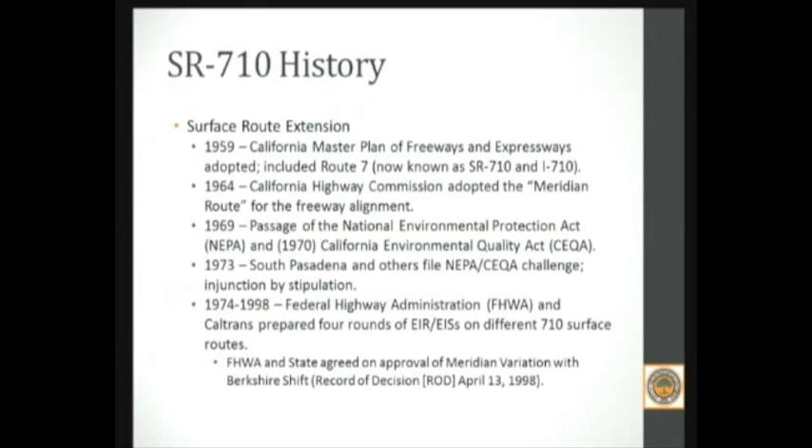We have some administrators at Boalt Hall who say you should use more PowerPoint, and my answer is that of the Marine General who criticized the PowerPoint Rangers in the Pentagon, that you don't argue to the Supreme Court in PowerPoint. So far we've managed to make it that way.

Anyway, Judge Pregerson issued this injunction in 1999, which was merely a preliminary injunction that said you can't build the freeway while we try this claim on the merits, but it was a rather thorough opinion.

In fact, the opinion was so convincing that in December 2003, the Federal Highway Administration decided that if this project was going to go forward again, all of the deficiencies cited by Judge Pregerson had to be cured, and in addition Caltrans would have to show that the project had financial feasibility.

And the state, a few months later, also withdrew its approval. So at present, there is no record of decision, there is no state approval. We're on a blank slate insofar as approvals on any highway construction in this corridor.

Then two more significant landmarks recently. As part of the campaign to build the freeway going back into the late 1970s and early 1980s, a former legislator and congressman from the Alhambra area succeeded in passing a state law that took away South Pasadena's right to insist on a freeway agreement as a condition of freeway construction.

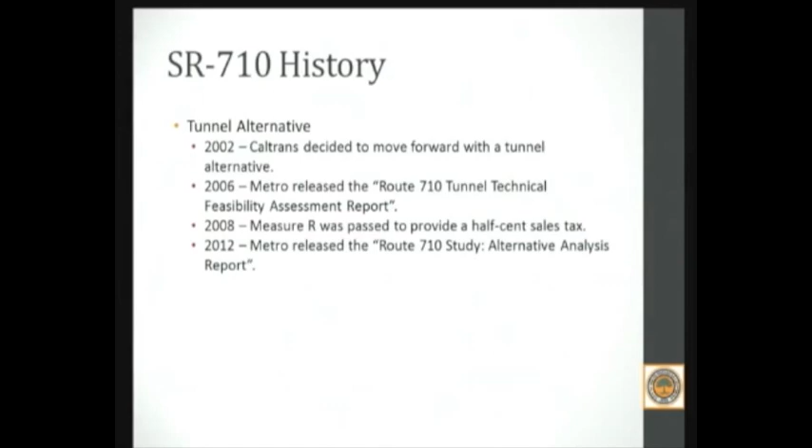Thank you, Tony. You are truly a legend.

Mr. Gold. Let's see. Hello, everyone, City Council, Mr. Mayor. My name is Avram Gold, and I'm here to talk about that.

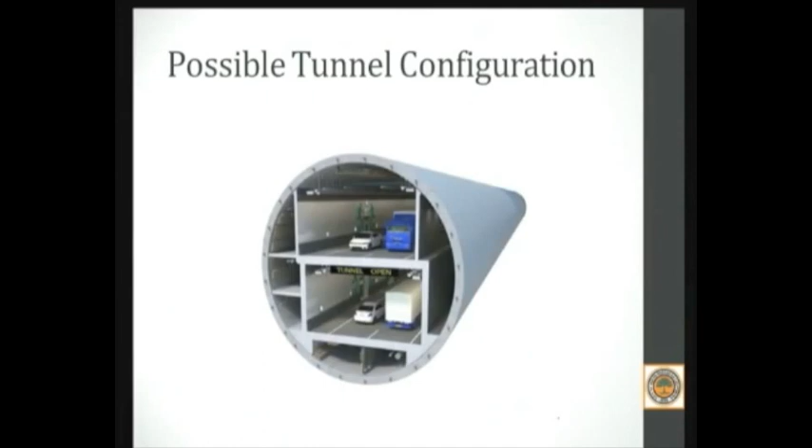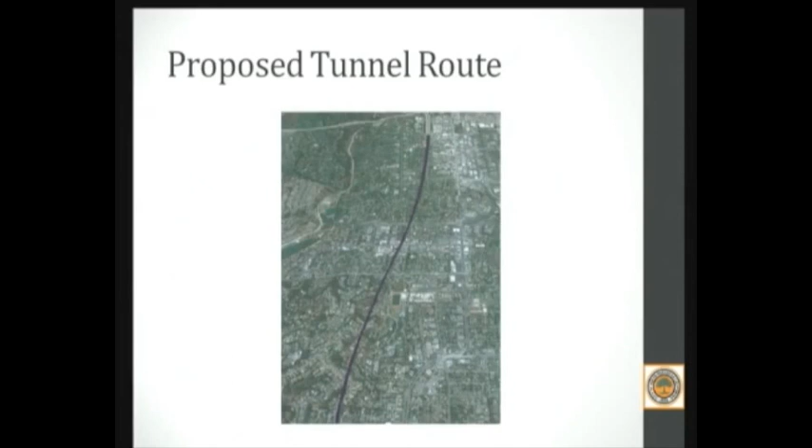One or two 60-foot diameter tunnels that will run under our homes, businesses, churches, schools, and stores in Pasadena, South Pass, and El Sereno. And under all of that, we have this.

Seven different rock and soil densities, along with five active faults. This is where the tunnels are supposed to go through multiple geological challenges. And when you have multiple geological challenges, you need multiple solutions for this.

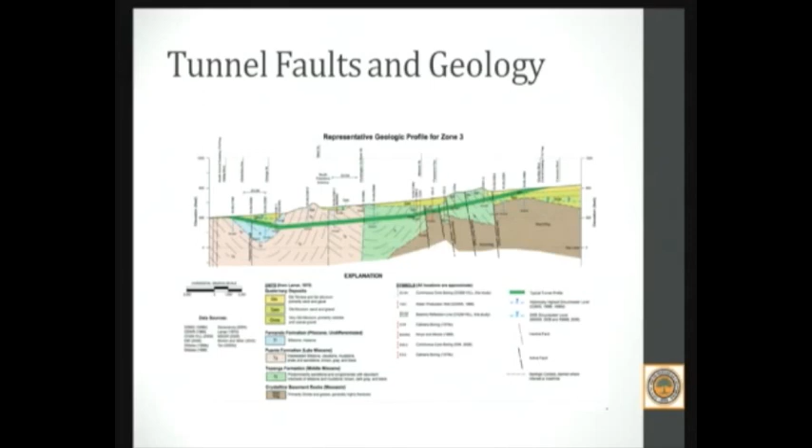A tunnel boring machine, or a TBM for short. A TBM breaks up rocks and soil and carries it away, and while it's doing that, it's building a concrete shield behind it and forms the tunnel.

For many years, 30-foot diameter TBMs have been constructing rail tunnels. But since 2003, when Paris built the A86 road tunnel, TBMs kept increasing in size past 38 feet, all the way to 50 feet, which became the largest diameter TBM to finish a tunnel without a serious breakdown.

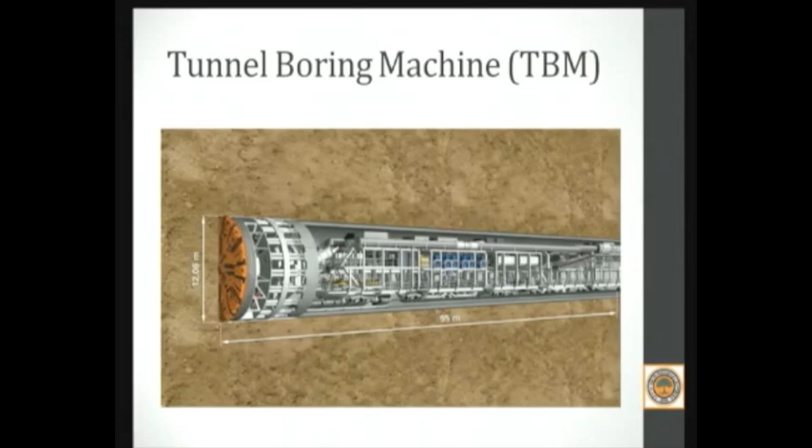Because in 2011, the Sparvo tunnel in Italy had a 51-foot diameter, and that dirt digger stalled for 2 months. Then in December of 2013, Bertha, the largest TBM in the world with a 57.5-foot diameter, overheated and stopped just 342 yards from the launch pit in Seattle, Washington.

And here we have Bertha at the launch pit with its giant cutting head yet to be attached. That's 5 stories high.

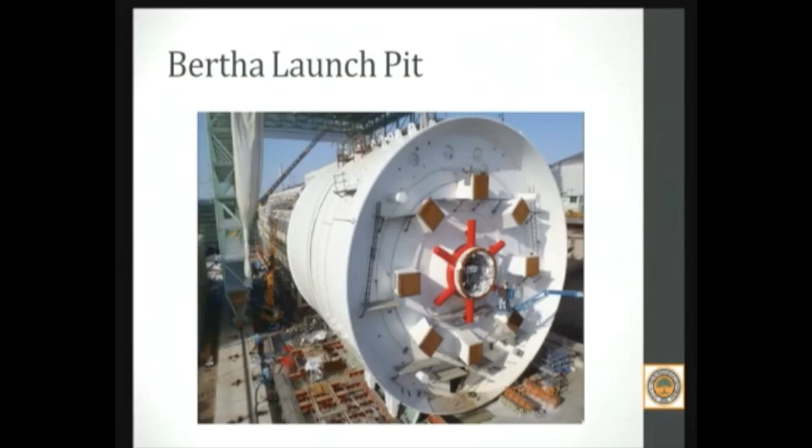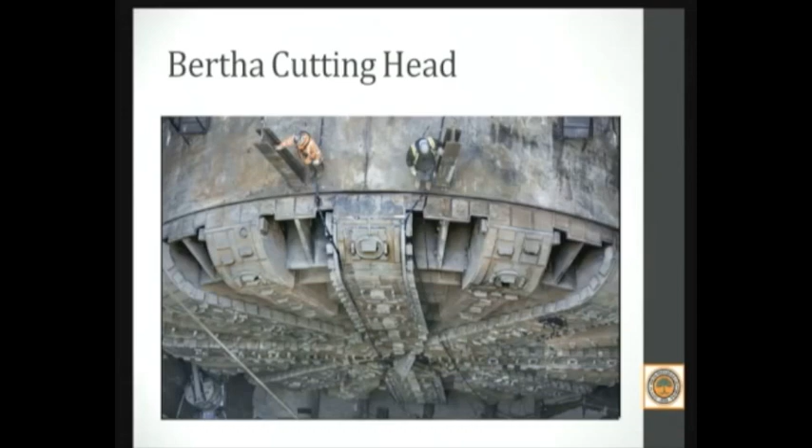Well, as I said, it stopped. And it stopped because muddy, gritty crud that was supposed to stay outside the TBM seeped inside the TBM and sludged around this. That's Bertha's big, giant main bearing.

Okay, let's see, where am I? All right, now the tunnel boring machines break down. They break down a lot.

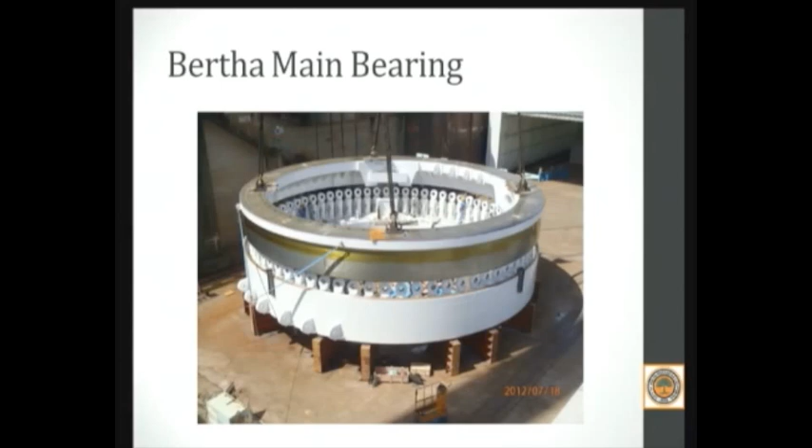And here's a table I put together, which is absolutely impossible to read, and I don't expect you to try it. I brought a number of copies that you can look at and take home. That'll be at the table after my talk and after this meeting. Anyway, this listing describes many things that have gone right but also wrong in the tunnel fabrication business.

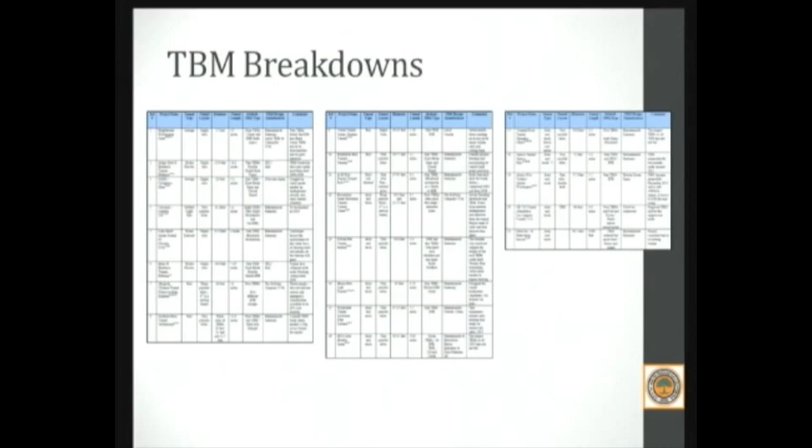Over half of the tunnel projects in the world have faced unexpected calamities, which of course cost a lot of extra money and time. When you're chewing away underground, you really don't know everything that's down there, waiting to gum up your machine or break your cutting discs made of super hard steel. Those black, round, double-edged things, those are the cutting discs, and they have to be changed when they wear out.

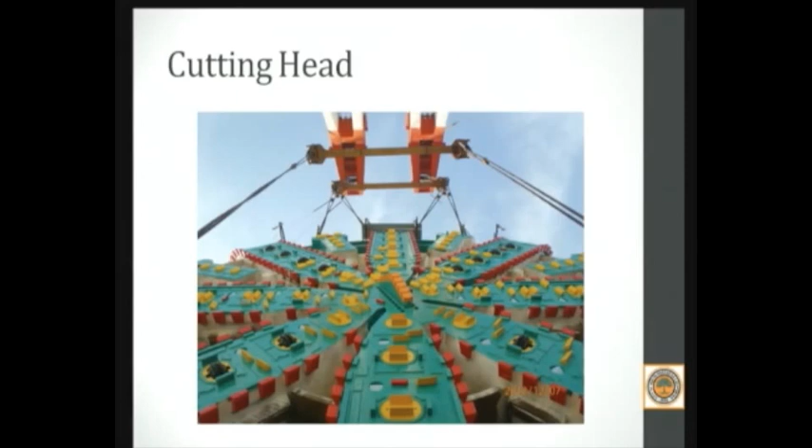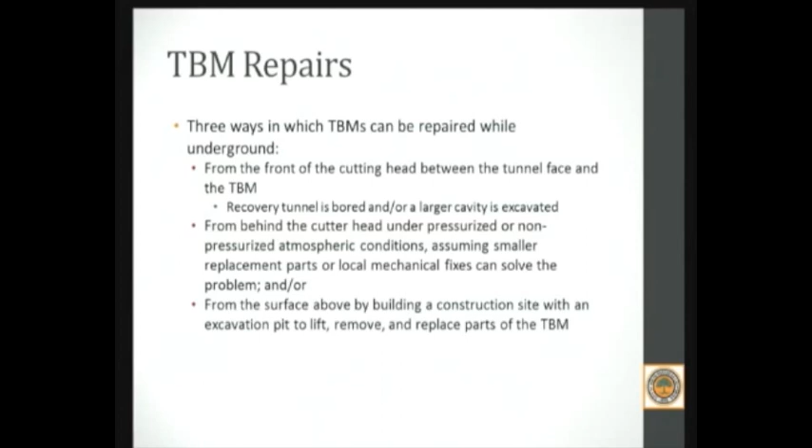Now, when things go wrong and a tunnel boring machine stalls and needs repair, there are 3 ways to get it going again. You can fix the cutting boring parts underground by digging out a bigger cave around the TBM and push to that cave by carving yet another tunnel. Or if it's just small parts that need changing, you can do it from behind the cutting head inside the TBM. Or you can do a mega fix like Seattle, where getting to Bertha is a very big deal.

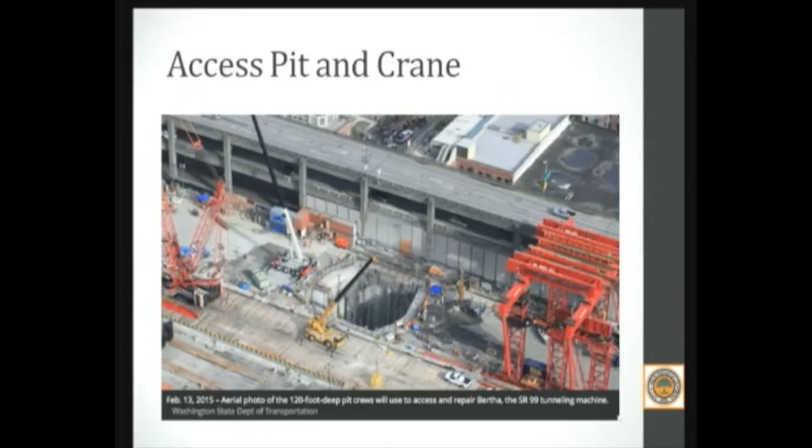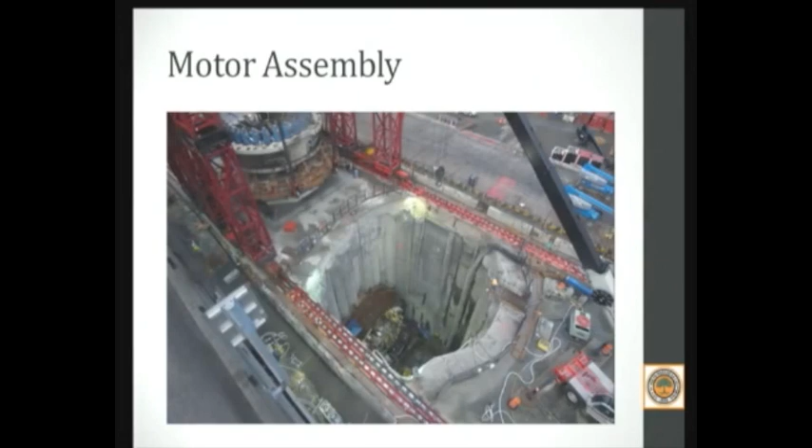Like scooping out a super big hole, 80 feet in diameter and 120 feet deep. Okay, you can see there, they've dug the ditch. Now what are they going to do? Well, they're going to take apart that giant rock and dirt eater and rebuild the cutting head and motor assembly in the sunlight where there's room to move around. Just like this.

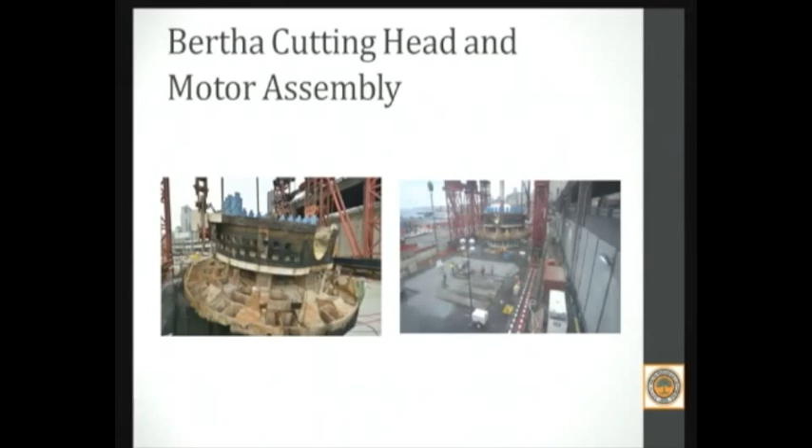So why am I telling you a Seattle story when we live in Pasadena, South Pass, and Los Angeles? I'm telling you about Bertha's big hiccup because this mammoth rescue operation, that one, could happen here.

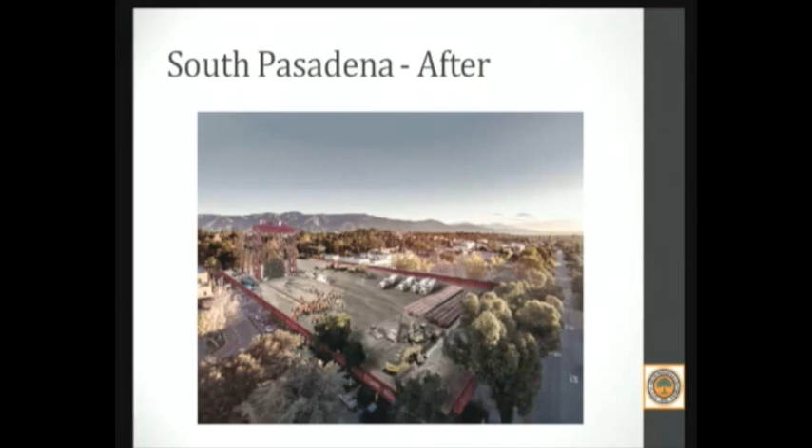Okay, granted, an above-ground salvage is a worst-case scenario. Maybe the broken TBM can be fixed underground by digging a bigger tunnel around it.

Well, the bigger cave that you build close to water, as in this water, these water tables, when you're close to aquifers, there's a good chance that water will find you in your tunnel and you don't want to be found there. And yes, you get flooded. A flooded tunnel drowns TBMs.

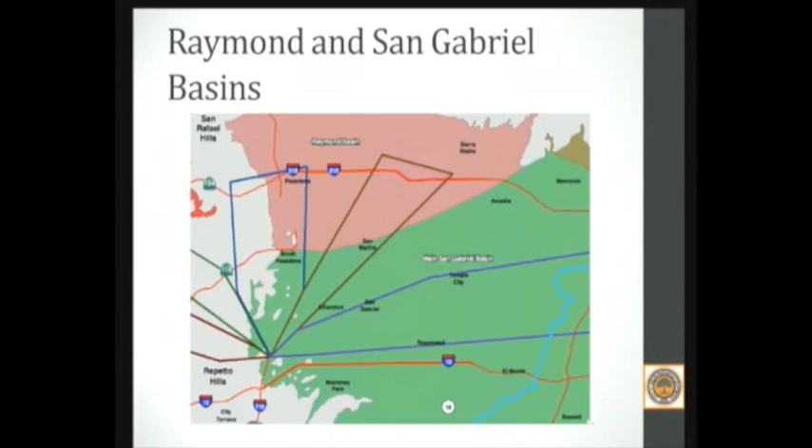So you try to outsmart physics. You pump the water out of the way near your big underground hole and beloved TBM. However, when you pump too much water out of the ground, the earth gets less dense and firm, and then this happens.

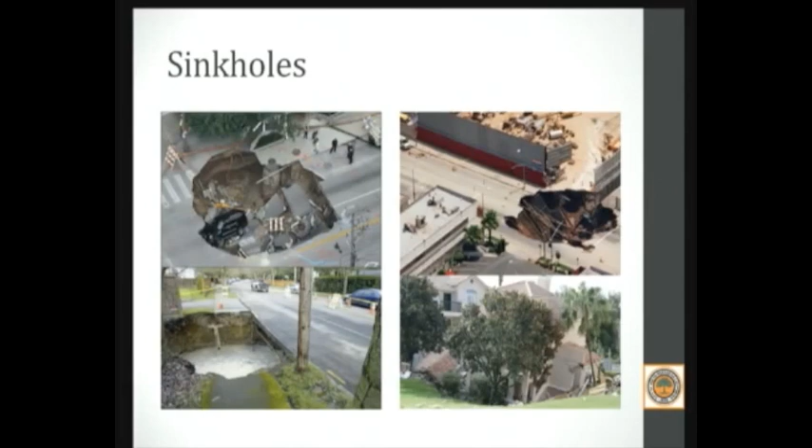Sinkholes. And guess what? In Seattle, when those very smart engineers pumped the water away from that very big hole to get down to their very big TBM, the ground nearby dropped 1.25 inches and moved some very big buildings and water pipes into places they didn't want to go.

Now, you people are very nice, and I don't want to scare you. I'm not trying to say that if the tunnels get started, all that bad stuff will happen. What I'm saying is it can happen. And unfortunately for us, Caltrans and Metro are saying it won't happen. And that's why there is no mention of tunneling failures or TBM breakdowns in the draft environmental impact report, yet.

These quotes from that same report tell another story. The preliminary design concepts presented herein are limited to the geotechnical information available to date. Concepts are expected to be modified and refined as additional geotechnical information becomes available. And Appendix C states, further study as to the type of TBM to be used for each of the alignments will be evaluated in future phases of this study.

And I'm thinking, wait a minute, aren't we supposed to be getting all this information now so that you and me and our friends at Caltrans can decide together if we want the tunnels or not? And if we, the public, are supposed to be alerted to all the significant environmental impacts that could happen, well, golly gee, we're not getting that information.

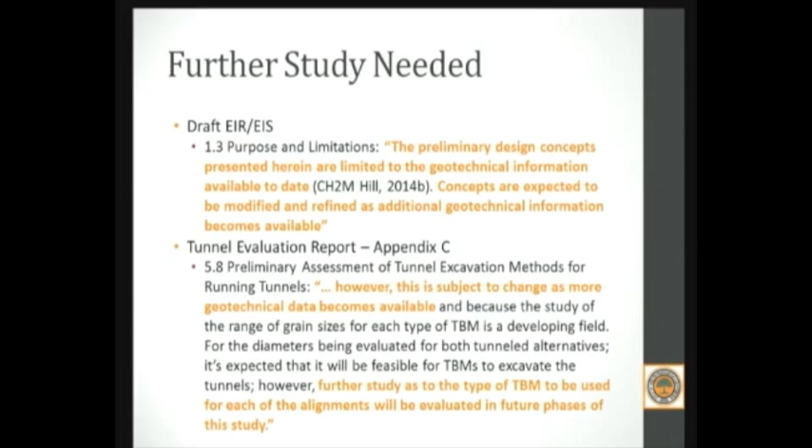We're getting just enough to assure us that everything will go as planned. Nothing to worry about, folks. Well, here's a recap of things we need to worry about.

There's still not enough geological tests for tunneling and too many underground unknowns. The SR710 TBMs must bore through 5 active faults and below 2 depleted water tables. Dewatering may create settlement issues, sinkholes, and groundwater contamination. Caltrans and Metro don't know what kind of TBM design they'll need because type and function is based on a complete geological survey, which has yet to happen.

And most importantly, the TBMs will be the largest and heaviest in the world and designed with untested technology. No TBM larger than a 50-foot diameter has worked without a significant breakdown, and ours would be 60. So there you have it, some things to think about.

And here's something else. If the tunnels go forward, no matter what happens, no matter how much they go over budget or their schedules are stretched, they will get finished. Every highway project of this magnitude eventually gets finished. But at what cost? What will we get out of it? And what will we be giving up? Let's not leave these questions unanswered. There's too much at stake. Thank you for your time and interest.

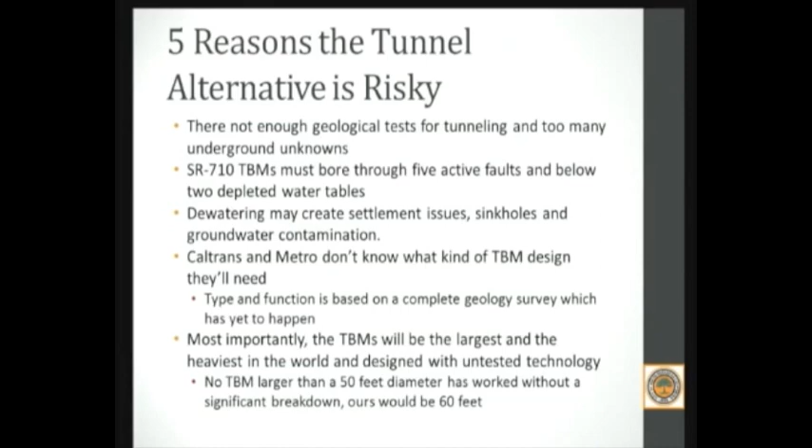One of your last comments with regard to the cost of the project, the tunnel boring equipment and the entire cost. I know the predicted cost of the 6-mile tunnel was $5.6 billion, for I think it was 4 on top, 4 on the bottom, lanes in each direction or two side-by-side tunnels. I know when I went to visit Boston several years ago, a couple times, I know they started at an estimate of $2.8 billion in the late 80s, early 90s, and today it's gone over $15 billion.

And still facing lawsuits, and things falling on people's cars. What's the track record of a lot of these projects? Again, estimated cost, as the engineers say, is $5.6 billion, Boston was 2.8.

From the research I've seen of tunnel projects around the world, maybe a third or 40% go way over budget. Some go a little bit over budget. Some come in under budget.

Generally, there are contingency factors put into the budget, and I believe Caltrans and Metro, from what I read, are putting a 35% contingency budget in, plus another 4% for right-of-way issues. Because if there are problems, and they do have to do an above-ground fix, they're going to have to take homes and businesses away through eminent domain, and there may be lawsuits there, and they're going to have to buy the properties. And none of that is mentioned anywhere in the draft EIR.

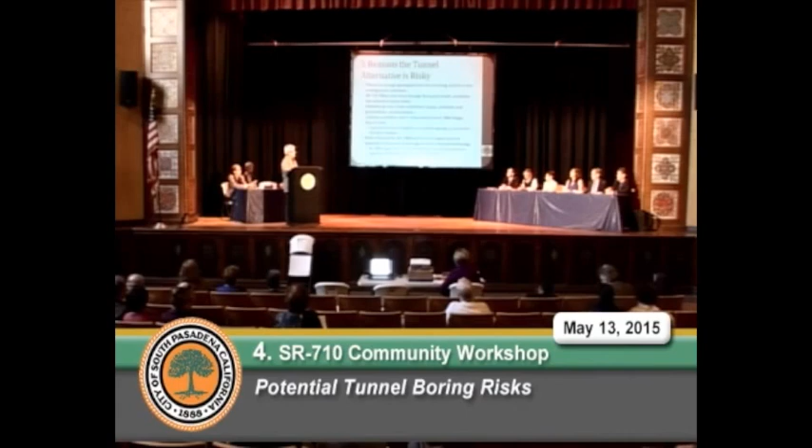Last week I had a talk with John Lee, who's the senior project manager out of Caltrans for this. And he had not even considered what it would take to move the pieces and parts from the ports to the sites, to the launch sites. And nobody in Metro could answer some questions to me, simply like, will the cutting head be able to be taken apart, or will it have to be shipped as a 60-foot disc? Because as a 60-foot disc, there's no way you can get it onto the freeways. And nobody could answer that question.

So I agree with you. I don't think they've thought this out, really. I don't know where they're coming up with their money.

Is there any other comments? Oh, Delane. I was just wondering, have you seen anything in the document yet referring to any possibility of methane gas? To be honest with you, I didn't look at that part of the draft. I was just looking at water issues, and a little bit about geological issues, but mostly about potential breakdowns.

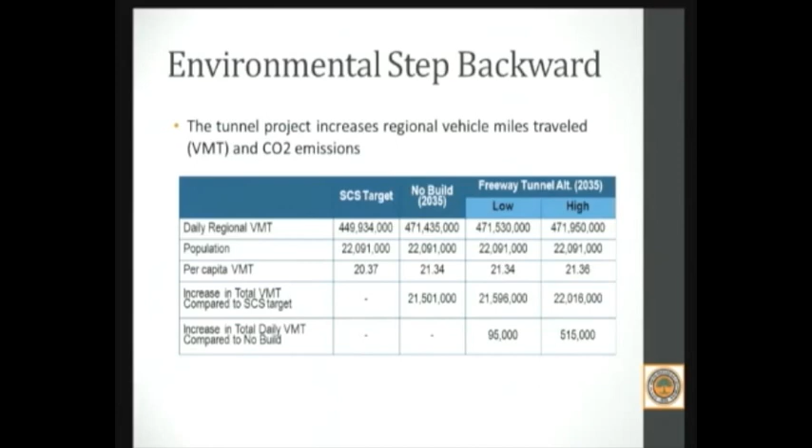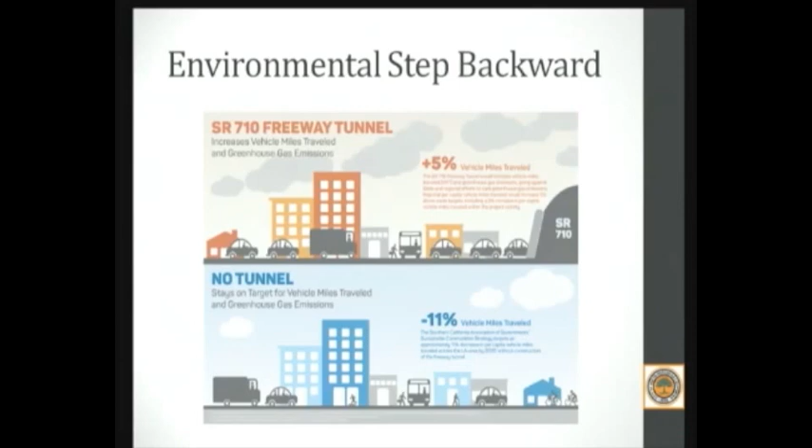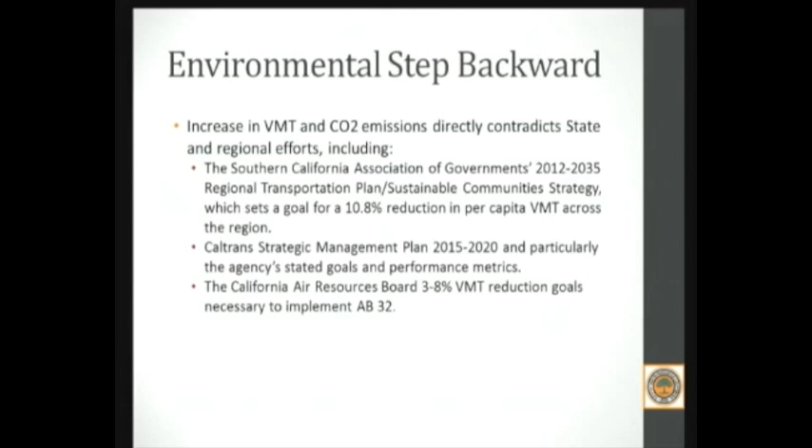All of this means that this per capita increase in vehicle miles traveled goes completely contrary to all of the environmental direction the state has established. It violates Assembly Bill 32, which requires reducing CO2 emissions, in part by reducing vehicle miles traveled. It's a violation of Caltrans's own strategic plan, which requires the state to reduce its per capita vehicle miles traveled by 15%. And it violates the Southern California Association of Governments Regional Transportation Plan and Sustainable Communities Plan, which sets a goal of a 10.8% reduction in per capita vehicle miles traveled.

So while inducing all of this additional driving, it also creates very questionable benefits. According to the environmental document, only about 14% of the traffic in the study area is what they call regional cut-through traffic. From what we can tell, they're defining regional cut-through traffic as people driving, say, from Monterey Park to South Pasadena—not just trucks wanting to come through from the port to the San Fernando Valley. So about 14% of the traffic during the peak period on arterial streets is going more than just from one city to the adjacent city.

The best options for the tunnel build alternative reduce that regional cut-through traffic from about 14% to between 7 and 11%. It's not eliminating this regional cut-through traffic, it's just reducing it by a few percentage points. More importantly, the project says that after spending all of this money, only 7 to 13% of drivers in the study area will receive any travel time benefit—and that's overwhelmingly the regional traffic that is cutting through your community.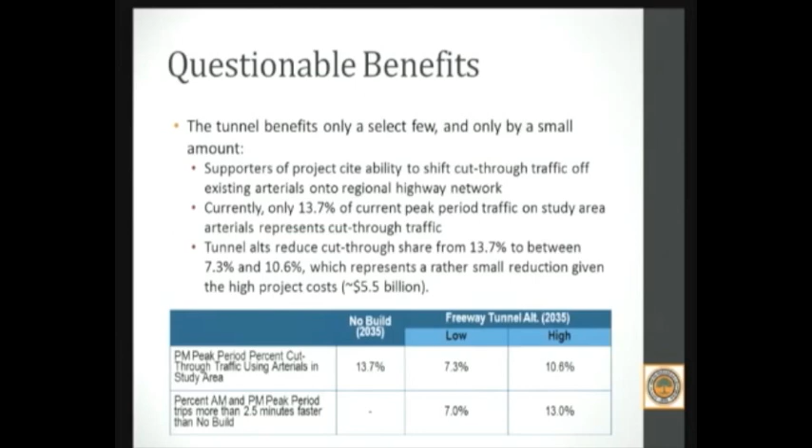The other 87 to 93% of motorists will either see no benefit or, very interestingly, will see their travel time worsened. So for most of the actual local traffic that all of you deal with in your daily lives, there will be either no change or a slight worsening in traffic conditions, based on the analysis I'll get into next. And to the extent there is a benefit, it's largely a result of people who are not living or working in your communities—indeed, because the project doesn't connect to your communities.

And the other thing that we identified, and I'll show you the maps in just a second, is that on a regional level, while there are specific locations that do receive some travel time benefits, most notably on the 605 freeway, the result of the project is simply to move congestion around. It changes the locations of the traffic bottlenecks, and in fact results in very significant increases in congestion on many of the freeways around here. Let me go through those in just a second.

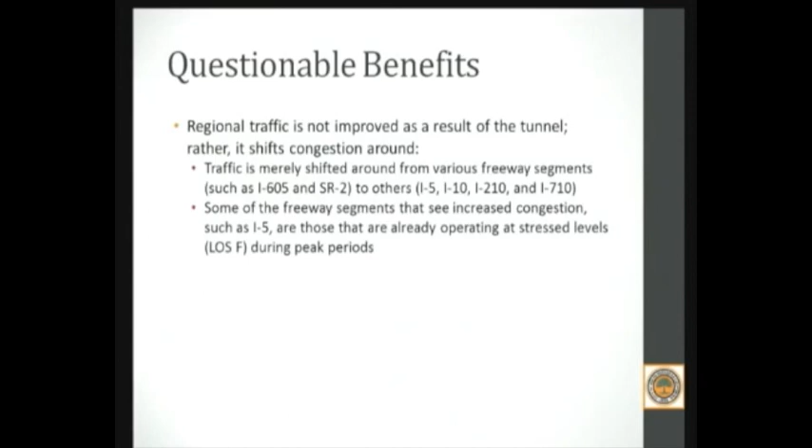One thing that I think is very important to look at, if you want to go look yourself, is in the Transportation Technical Report, figures 5-8 and 5-24, along with table 7-16. There are a series of maps that compare regional freeway level of service under the different scenarios. Now, what they don't do is the subtraction, comparing the build options to the no-build options. So we tried to do that for you, showing the difference between the different options.

What you can see on this slide is that building the tunnel here results in some significant shifting around in traffic. The biggest impact is reducing traffic on this stretch of the 605, just south of the 210. So traffic that is currently, say, going to Arcadia by going this way could instead use the 710 and go that direction. But more importantly, you'll notice where the red lines are—these are places that see a significant worsening of congestion. And of course, connecting this results in a huge increase in driving on this part of the 710 and naturally on this whole part of the 210.

The other thing that is most interesting to us is that the induced driving this project creates doesn't even alleviate traffic on I-5. Traffic on the 5 actually gets worse as a result of the build options. Now you can imagine if you're adding traffic to the 5 and adding traffic to the 210, where those two freeways meet, just before the Antelope Valley Freeway, there's going to be a horrible bottleneck situation created. Just a little bit of alleviation over here in Irwindale.

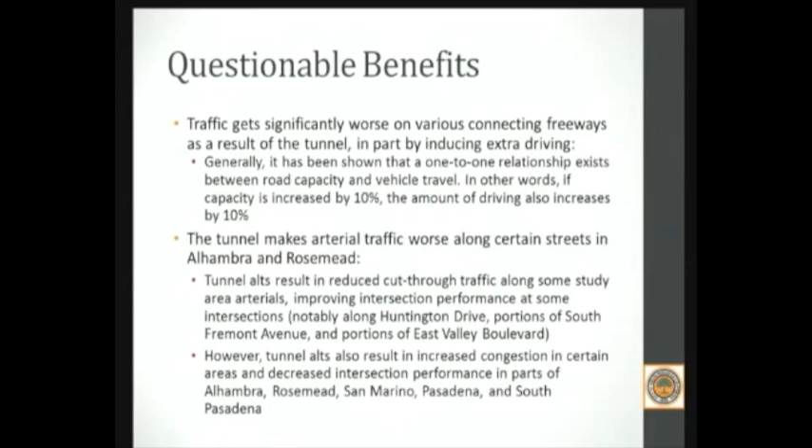The other thing we found that was even more fascinating—and again, you've got to really wade into the detail to understand this, because the analysis is not provided in a clear and upfront way—is the impacts to local streets, to arterial intersections. One thing we found interesting in the tables was that the traffic congestion, or at least the traffic volume, and much of the acute congestion in your study area is not a result of north-south traffic, but really east-west traffic, and specific bottleneck locations that have to do with the design of the freeway stubs.

So if you look at the differences in the arterial intersections, comparing the no-build to the build options in the morning peak and the evening peak, you'll notice that in the morning peak, there are more intersections that actually get worse than are improved. The red dots are intersections in each of the cities in the study area where there's a worsening of arterial intersection congestion, in order to create some alleviation, again, in scattered locations around the study area.

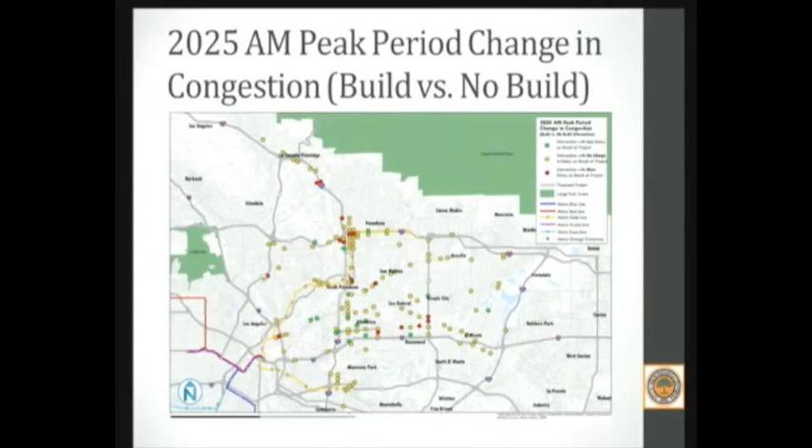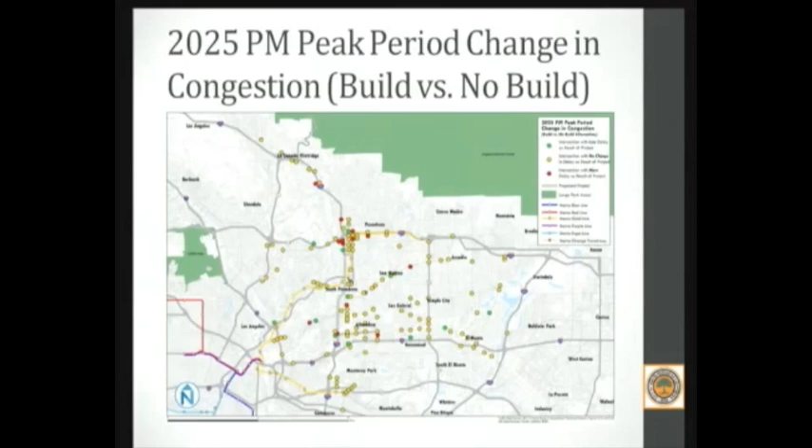But things are getting significantly worse, particularly in Pasadena, and especially in Rosemead, and things are basically awash even in Alhambra. In the PM peak, there's basically an equal number of intersections made worse compared to those made better. Again, why are we spending this much money to move congestion around rather than solve congestion, with the only benefit being to those people doing regional trips who are using the tunnel?

Now, there are other problems that we found with the study, largely having to do with the way the project purpose and need is framed.

The purpose of this project asks the question: if there were a big north-south transportation project connecting one thing called the 710 to another thing called the 710, what would that project be? While that might be an interesting question, the way the purpose and need is framed does nothing to help the San Gabriel Valley address its real and acute transportation needs.

The transportation needs in the San Gabriel Valley are not just north-south in this one particular corridor. They're all over the place, in part because of the travel patterns of the San Gabriel Valley.

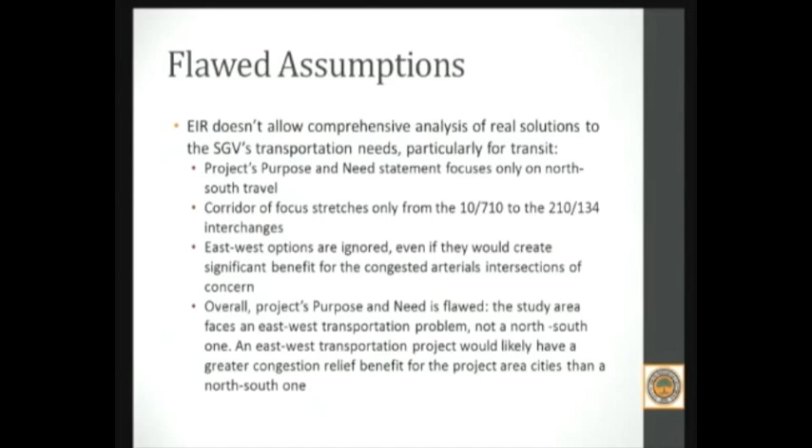East-west options were completely ignored, and accommodating the preponderance of trips in this region that are short trips are also completely ignored. Of the study area residents within the environmental document study area, 40% of them live and work within the study area. That's a very high number.

In terms of commute trips, there are lots and lots of relatively short commute trips, and over 90% of the study area residents work somewhere in Los Angeles County. Similarly, 90% of the study area employees live in LA County, and about 60% of the non-work trips — so 80% of our trips are non-work trips — start and end within the study area.

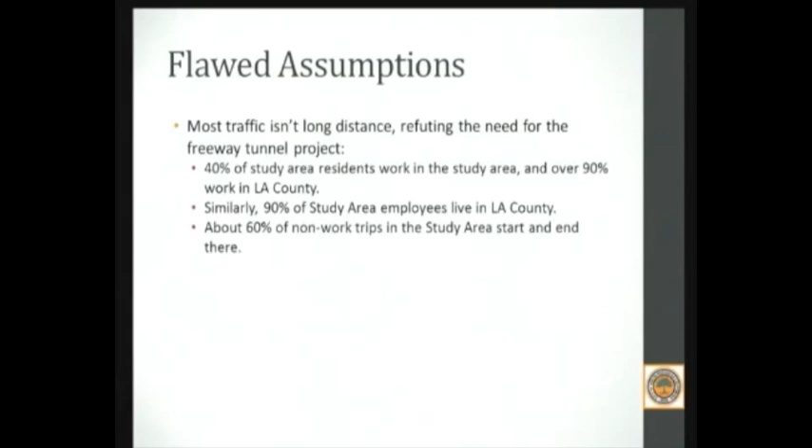The bulk of the transportation need here is not regional, it's local. And this project does absolutely nothing to address that.

The study also assumes a straight line increase, that as population and jobs increase in this area, driving increases along a straight line, when in fact the data is very clear that that's not true.

You can go into Google Earth Pro, which is a program you can download for free, and look at historic traffic data for streets throughout this region and see how they've changed over time. For the most part, they've remained basically stable as this area has grown significantly in terms of jobs and population, and in many corridors the traffic volumes have actually declined.

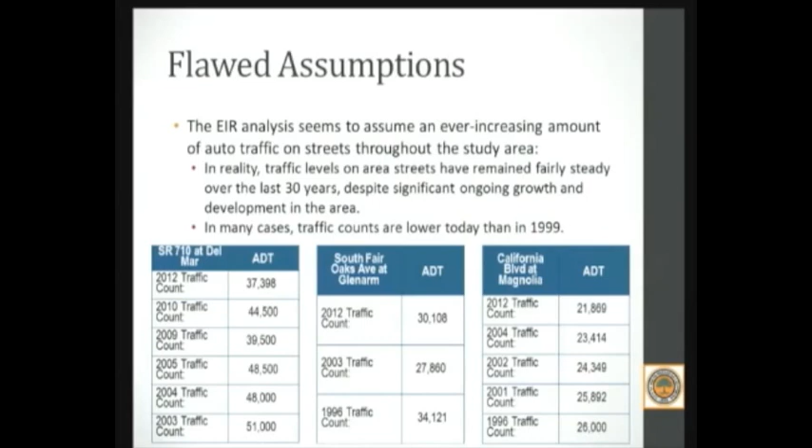So all this is to say that while your region has dire transportation needs, there is no good project that can come out of this environmental document, largely because the project purpose and need statement is flawed. Yet there are so many things we can do to address the real transportation needs here.

In addition to looking at the environmental document, the 5 cities have asked us to look at the study area and see what could be done that might be better, recognizing the fundamental flaw of this study, which is what we're calling an OCD problem.

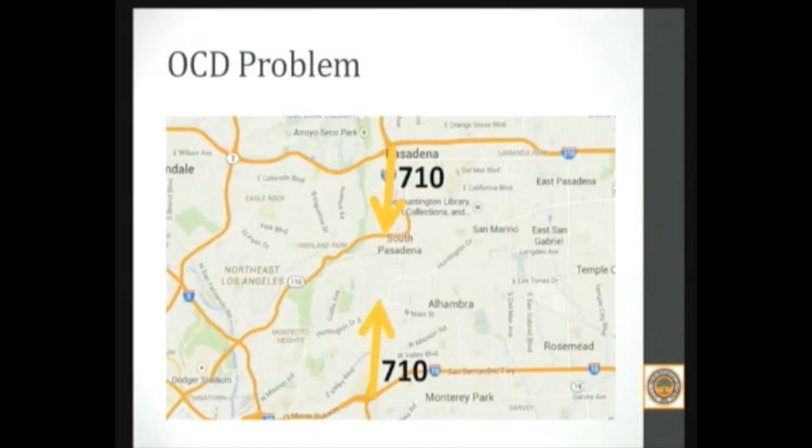Traffic engineers have an obsessive compulsive disorder that there are 2 things called the 710 that point at each other but don't connect, and it bothers them. Surely something must be done to solve this problem, right? Regardless of the cost? No.

What we need to do is look at the data and understand the travel patterns that exist here, and develop 100 small transportation solutions to address the complexity of this place's travel demand patterns and needs. A single giant tunnel does nothing to address your local travel demand patterns.

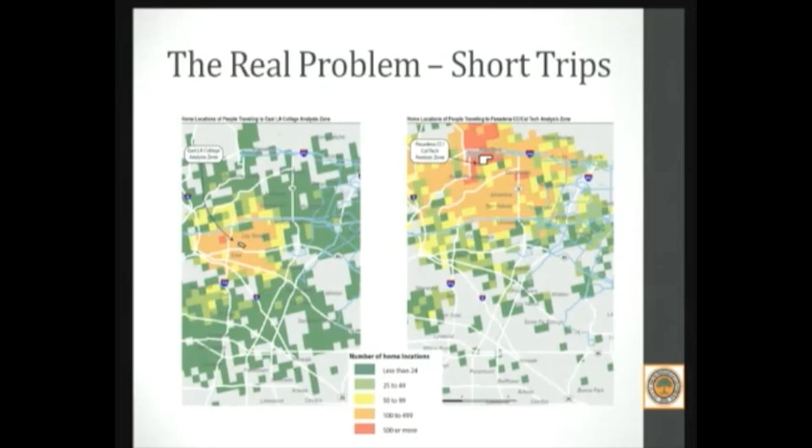And yet there are a lot of projects, many of which are already planned or underway, that will help. For example, the Gold Line extension that's underway.

We're also looking at a variety of other transit projects that could be done affordably that actually respond to the origin-destination patterns — for example, having really high quality bus transit from North Hollywood to Burbank to Glendale through to Pasadena and into South Pasadena and Alhambra.

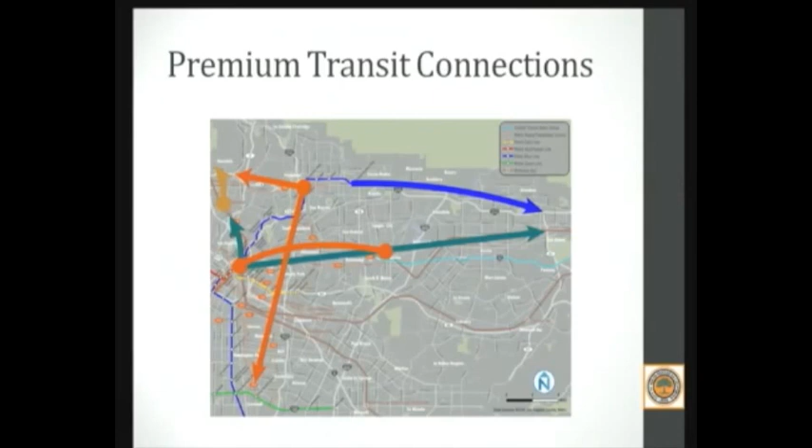Upgrading Metrolink, upgrading the El Monte busway, completing the Gold Line, doing bus rapid transit along Atlantic Avenue, connecting into Cal State Los Angeles and into all of the major destinations in Pasadena, but also continuing down south all the way to the Green Line station at Long Beach Boulevard. This is a transit network that could form the backbone for a mobility system that works for this region, not just being a replacement for the freeway project.

We also looked very carefully at the success of Cal State Long Beach, which has given all of its students, faculty and staff free transit passes for the full region. That has had an immense impact on the travel behavior for people in that intense node of Cal State Long Beach.

If we were to apply a similar program for the 84,000 students at Pasadena City College, Cal State LA, and East LA College, we could get a similar traffic demand reduction at a much lower price than anything being considered for the capital projects. In fact, for 30 years of free transit passes for those 84,000 students, it would cost a lot — but still far less.

It would cost $500 million but would provide real benefits that actually reduce the demand for all of our existing streets and highways, rather than increasing demand by building more supply.

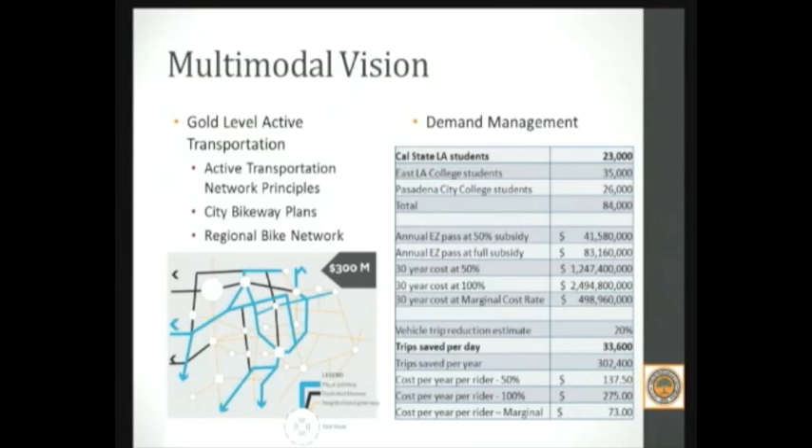We're also interested in building out the bike plans for all of the local jurisdictions, not only doing that but taking those bike plans to a gold level, having the San Gabriel Valley have the highest quality bike and pedestrian facilities in the United States. Comparing that to the cost of a giant tunnel, you could have the most walkable, bikeable communities anywhere in the United States at a small fraction of that cost.

So we've been starting to do cost numbers for all of this: building out these transit lines, providing incredibly high quality walk and bike amenities, doing spot congestion relief at critical intersections, making a lot of the TDM, TSM solutions actually work, and doing all of this gold level transportation demand management, coming in at almost half the cost of the tunnel and creating real benefits for your community.

So I would urge you to demand better from Metro and SCAG, and demand a better solution that actually benefits your community. Thank you.

Questions or comments from the council? I have some, but I'd be willing to wait for anybody else. Mayor Pro Tem? Yes, thank you, Jeff.

Excellent presentation. You mentioned that the project does not connect to South Pasadena. Could you explain why you said that, the basis for that statement? So the tunnel is effectively a bypass, right? In terms of being useful for that preponderance of trips that are actually fairly short distance, it does nothing to create a direct transportation benefit for your community.

What it does is reduce some of that regional traffic, a rather small percentage of traffic that is people driving through your community who don't have an origin or destination either here or among your neighbors. What we were actually a little surprised to find, though, is that the benefit of eliminating some of that regional traffic wasn't showing up in any of the actual traffic analysis, that as many intersections were made worse as were made better.